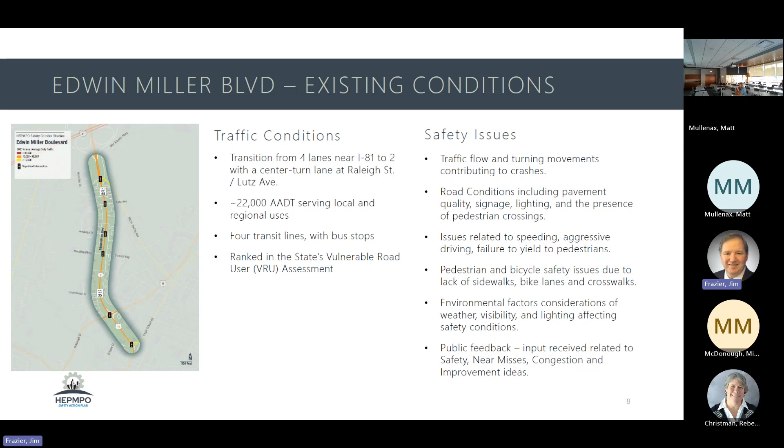There are issues documented through our surveys or other stakeholders that there is speeding and aggressive driving along the corridor, and drivers do not yield to pedestrians. There is a lack of pedestrian and bicycle facilities along the corridor. Other contributing factors like weather and lighting also contribute to safety conditions, along with some of the feedback I mentioned.

For future conditions, there are some multifamily residential developments planned just outside the corridor that will obviously have an impact. There's an increase in traffic and non-vehicle traffic expected, and there are some proposed improvements along the corridor, at intersections like Moler and Warm Springs, which is ongoing now.

Is it complete now? Still ongoing? Okay. It got the priority corridor designation, and there's a new traffic signal planned at the courthouse intersection.

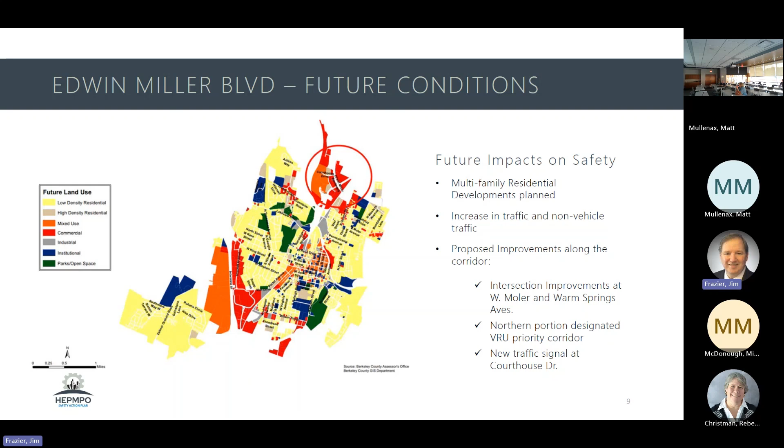The primary need for the assessment is what we'll refer to as KSI, accidents that resulted in a killed or severely injured outcome. We used 5 years of data from 2018 to 2023, showing a total of 564 accidents along the corridor in those 5 years, including 3 fatals and 6 severely injured accidents.

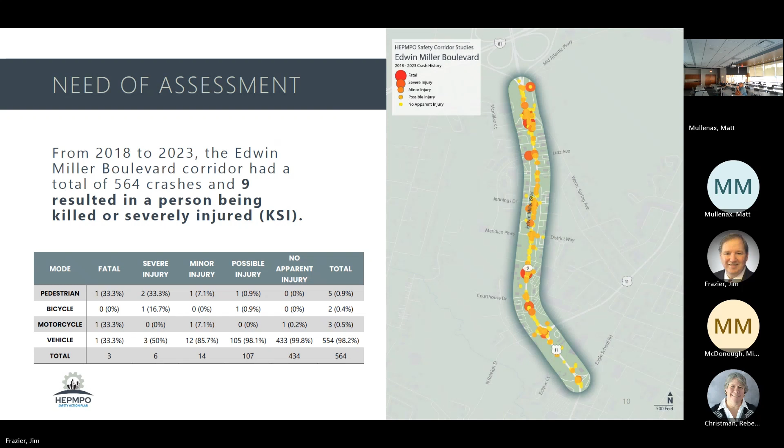We did do an on-site visit. About 20 of us walked the corridor. There are a few pictures, but it was very helpful to get on the ground and get feedback from other stakeholders on what we observed along the corridor. You can see some bicyclists there, and we saw a guy in a wheelchair driving on the shoulder. Little stuff like that is very helpful and provides good insight into what we need to recommend.

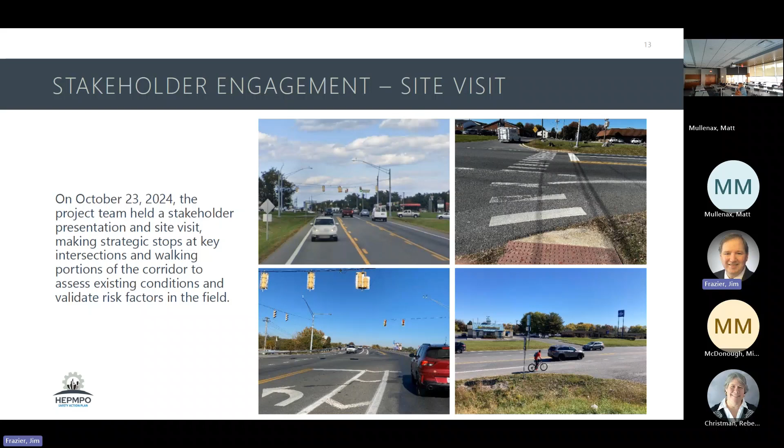As part of this stakeholder engagement, we used a risk assessment tool sponsored by Federal Highway. That means you score the exposure, the crash likelihood, and the severity of each intersection and segment along the corridor. Then from that, you recommend improvements and rescore it, and that delta shows how much risk you can expect to be reduced.

There's a lot of opportunity for reducing risk at the intersections. And like I said, the detailed assessment is included as one of the appendices if you really want to go through and dig through the numbers.

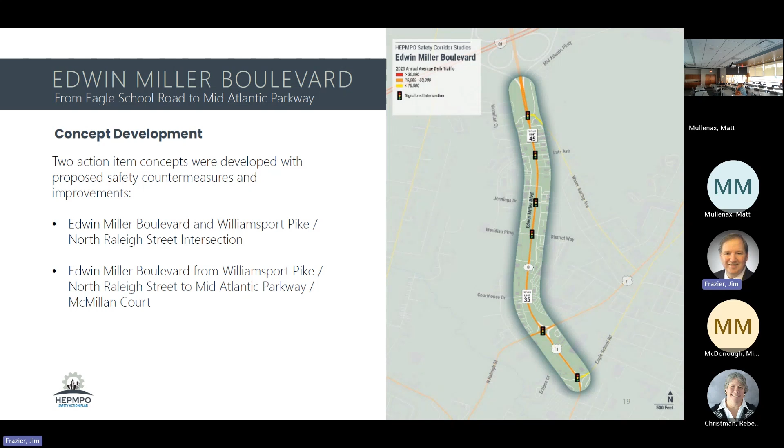We'll focus starting on the east side—or south side, it runs kind of northwest. This is the Raleigh Street intersection, and you can see a lot of the recommended improvements here.

One improvement is getting rid of the separated right turn lanes. Rebecca is on the line, our traffic engineer—she really understands it and does a good job developing these, so if I start veering off, Rebecca, speak up. That dedicated turn lane, we're recommending to remove altogether, so it comes back to a traditional four-way intersection.

They're known as channelized right turn lanes, and we're proposing to change them to dedicated right turn bays, bringing them into the main leg of the signal. So we're maintaining a dedicated turn lane, just not having it channelized and free-flow. Drivers would have to make a right on red or wait for their green signal.

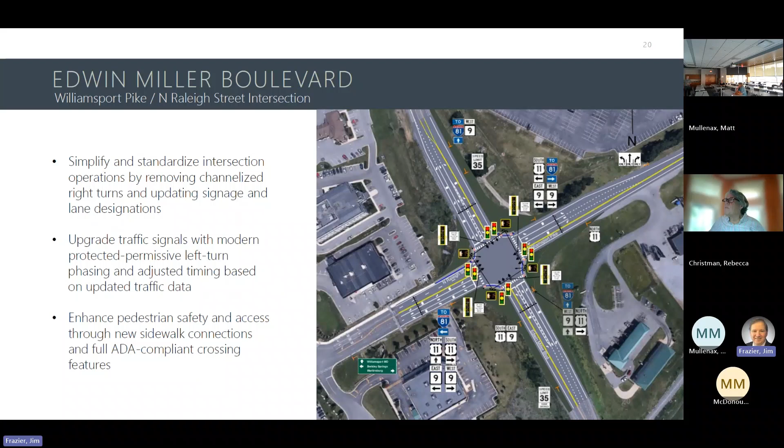This is a blow-up of a cross section of what the lanes would look like, facing toward I-81 on Edwin Miller. So, 12-foot lanes with a 5-foot buffer between the straight lane and the left turn lane, and then you have your dedicated right turn lane on the right. You can see how the channelized right turns are no longer there.

The buffer serves to offset the left turn lane so drivers can see past the opposing left turn lane and see oncoming traffic better, making a better decision about whether to turn during the permissive portion of the left turn phase when it's not protected left.

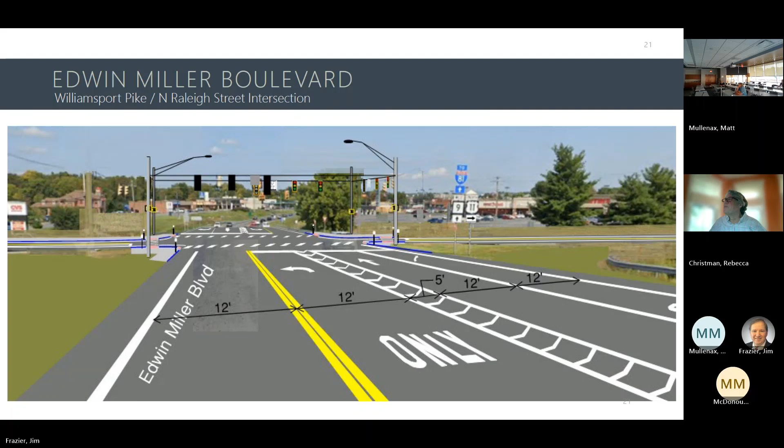Everything we're doing here is conceptual. The next phase to move forward would go into more detailed engineering, so a lot of the specifics would be worked out there.

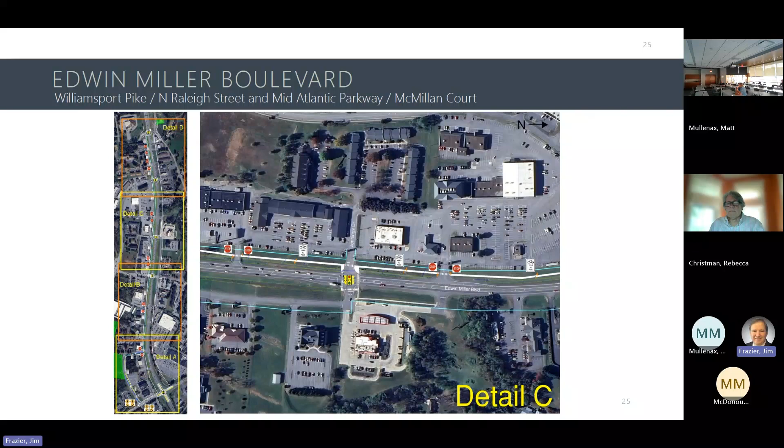This gets down at the far end, right at Warm Springs. Same thing - there would also be some bicycle signs saying yield to pedestrians, so the pedestrians would have the right of way over the bikes. Obviously a safety measure there too. So I'm going to quickly go into what these intersections look like.

Okay, so every intersection would have these improvements, a full suite of pedestrian features, constructing 10-foot sidewalks and crossings along the multi-use path. You can see here, that would be the bike path. These would be the ADA curbs. Then you have the pedestrian buttons for crossing, and also the signals would all include backplates, which would highlight them, so it's a lot easier to see, especially at night.

We're also talking about optimizing the signal timing along the corridor, and changing out the left, or either adding left turn phasing in heads or changing out what's there. If there already are 5-section heads, change to 4-section flashing yellow arrow to run protected sometimes of the day, protected permissive sometimes of the day, and then pedestrian override of only protected. If the pedestrians push the button to cross, then you don't let the left turn run permissively while they're doing that. So once you change out that head, you can do that.

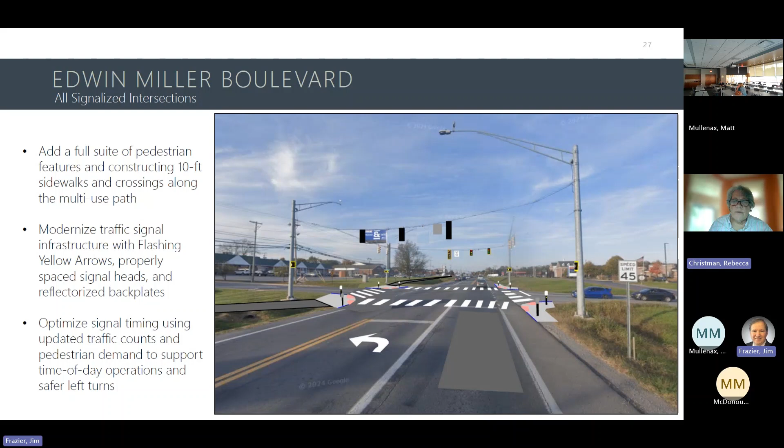The flashing yellow left turn arrows - yeah, I hope that would make a big improvement.

And then this talks about those traffic signs there, or the bike ped signs that would be installed at Forbes Drive. So that's showing an uncontrolled crossing, but to connect it, because that intersection is free flow on Raleigh Street. So you paint up the crosswalk as a high visibility crosswalk and give it a lot of signing so the cars know to look out for the shared use path, basically crossing there to get to the new park constructed on Forbes. That's the connection to the existing situation.

Right, because the bike path runs on this side of Raleigh, and this side is all sidewalk. So the bike path would cross there to get onto the new bike path. And then closer down to Raleigh, once you close off the channelized right turn lane, there's actually room to complete the construction of the sidewalk. With the channelized right turn there right now, there's no room to continue that sidewalk without falling into that giant ditch. But if you close that off, you can get the sidewalk all the way to the intersection and give those pedestrians heading to those shopping areas across the street safe passage, safe crossing.

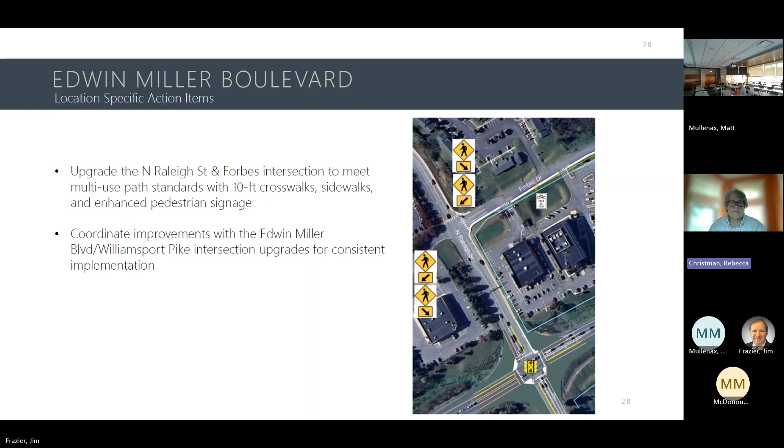Okay, well, let's stop here. Any comments or questions on any of the concepts that we've identified?

Just quickly on the monitoring and evaluation - all this is that we will have a tool to continue to monitor the crashes. 2024 data is now available, but especially after countermeasures get implemented, we can go back and see what kind of impact that had, especially on the KSI crashes.

And then going into the next steps, we are in the public comment period, obviously. That ends on the 23rd this month. After that is complete, we will respond to the comments, make any changes to the report as required or needed. Then we will finalize the corridor report, and that would go back to Matt on his website. And then if there's any assistance needed for any grant applications, we would support that as well.

It kind of sucks that it's so quick, but there's a lot of good, and then obviously those grants do have a local match, which also has proven very, very difficult.

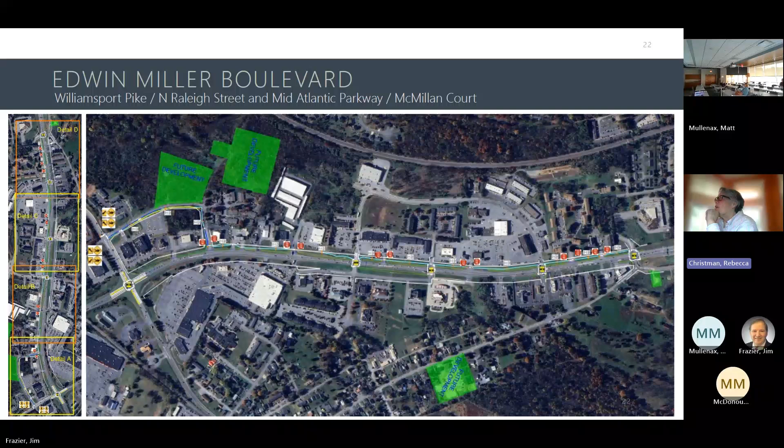And there is a tunnel under the expressway, a pedestrian only tunnel between the mall parking. Can I steal your screen? This is the expressway here, US 30. I don't know, can you guys see that? And then this is the mall, here's the mall parking, and then you can see this pedestrian path goes under 30, the expressway, and comes out to this public park that has big events.

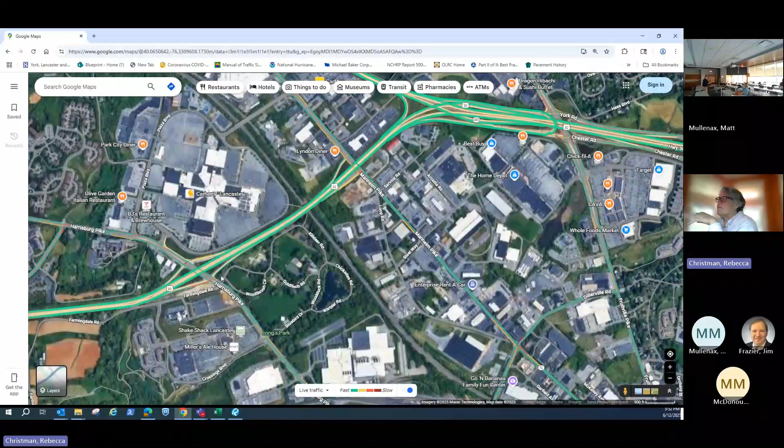And this is just pedestrians. So obviously this is a US expressway that has allowed a pedestrian tunnel underneath, instead of bringing them across this interchange, which is a similar situation as yours, which would just be hazardous.

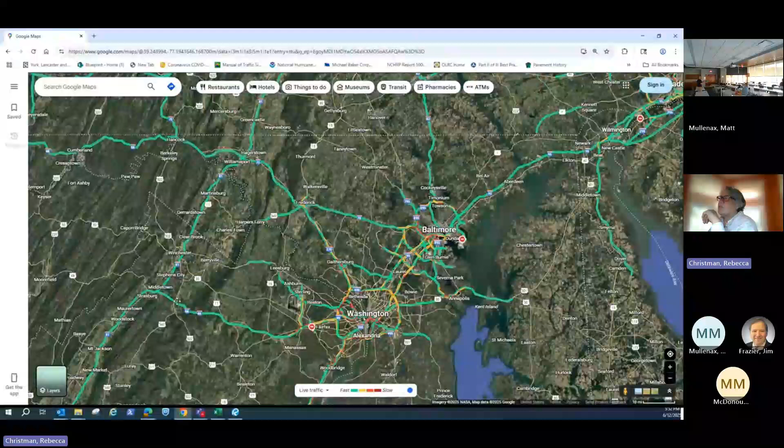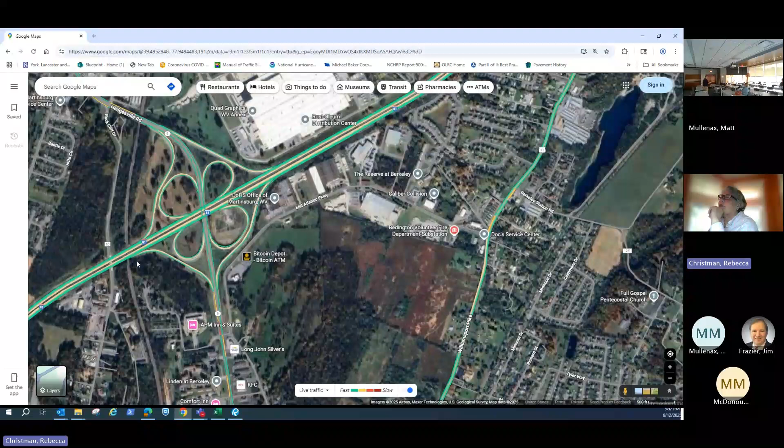It's tricky, but the buses definitely sound like a better option. Yeah, and all the EPTA's buses have bike racks on them and ADA seating.

Some language in there about future bus stops, take advantage of the routes that come through there, trying to get folks, at least provide the option, right? I don't know if it'd be a place to even add a wide spot for a bus stop somewhere that targeted there. Oh, like a little pullover area or something.

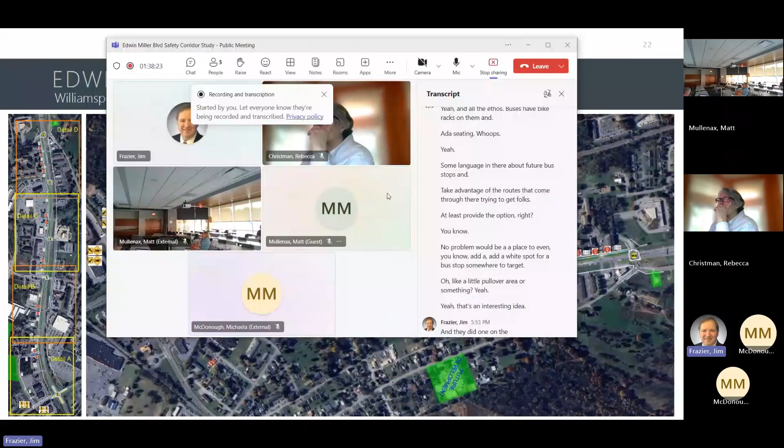Yeah, that's an interesting idea. They did one on the dual highway in Hagerstown, right in front of the senior living, you know, where most of the customers live.

We have some ridership data, I don't know if we have a ton on the flag stop stuff, but if they happen outside the geofence, it doesn't count until the next stop. So, yeah, that's interesting - there would be a spot.

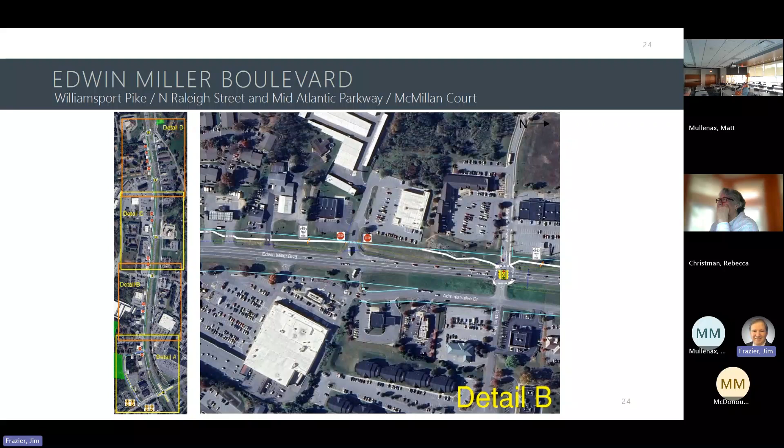You should probably lay this next to the TDP now. Yeah, we can make a note. We're working on EPTA's 5-year plan in parallel, so we can send a note to Jared to consider a spot, or at least have that reference, some sort of partnership with the state on a capital project or included in a grant or something like that.

I just wonder, when we move to race and rally, how that pedestrian traffic will change, because we'll be there to pick up everybody heading that way instead of them having to go to the train station. I could see folks walking down and hopping on there. I see people cross every now and then trying to get to the Walgreens. Actually, I see more people walking here than to the CVS.

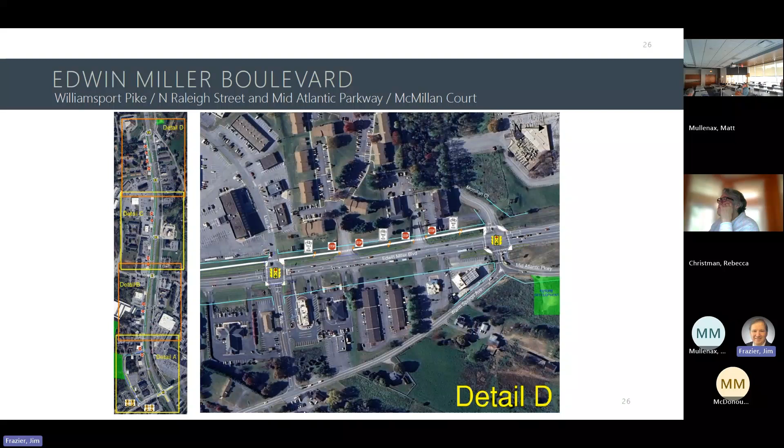My only comment is that intersection at Forbes and North Raleigh is where we got T-boned. Somebody pulling out of Forbes, I'm sure I can defer to the sheriff, but they just don't yield off of Forbes. They're trying to get out and head north on 11. So I just feel like some improved, maybe flashing yield signs or something.

They have those wonderful solar blinking signs for pedestrians, the RRFBs. I had considered that. What I'm concerned about is there's a little bit of a sight distance issue coming over the signal at Edwin Miller in Raleigh. I was concerned people might come over there, and if somebody saw the flashing light and stopped quickly or unexpectedly, we would increase rear end crashes, the exuberant stoppers versus the more relaxed stoppers, expectations crashing. I was thinking maybe pedestrians need to be more careful and not rely on people stopping. I was a little concerned about that short sight distance.

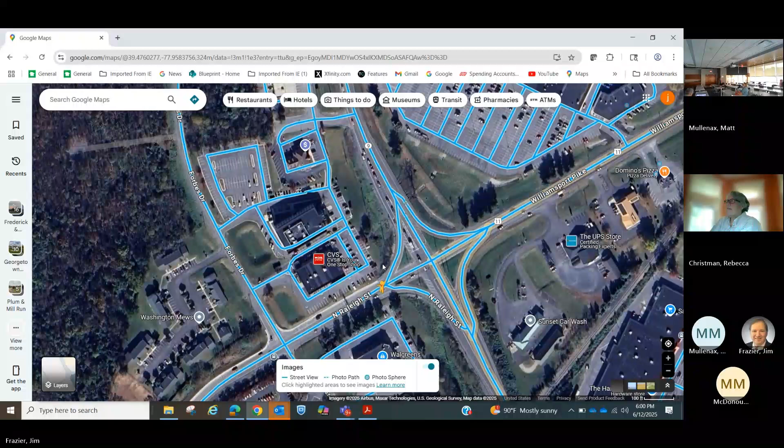I think we're talking about Raleigh Street, right? Yeah, I'm on the wrong street, aren't I? Yep, an overhead sign, black and white. Sorry about that, that's okay. Okay good, just flip it around, Jim. Yeah, there we go. That just is kind of saying this is what the lane configuration is going to be, because you don't know what lane's what, really. Right there you're only 2 lanes, and you're not even sure which one's going to open up to which side at this point, if you're unfamiliar with this road.

I'd be inclined to get rid of that right turn bay. Just let them turn out of the straight through lane, and let the left develop like a left turn bay. And then maybe, we could.

Was it a bus that got T-boned? Somebody pulled out in front of us, we T-boned them, but they literally pulled out in front of us from Forbes, turning to go north on 11. The bus was going south. No, we were heading that way, same direction. She just pulled out, didn't see it. My guess is she was confused about which lane did what. I mean, there's no missing a bus coming, so I'd be surprised.

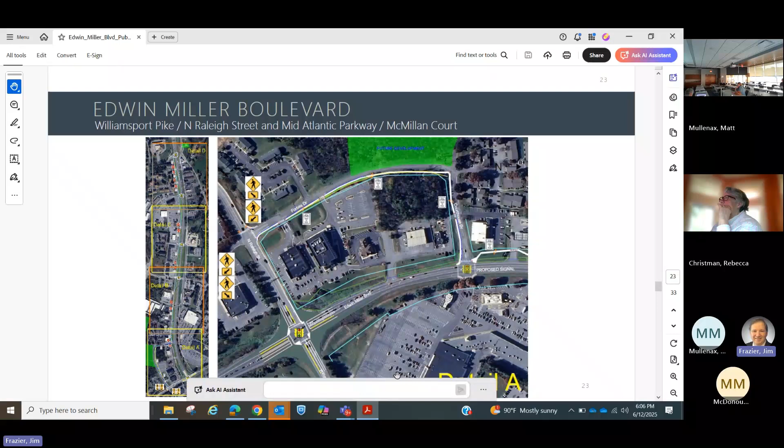Okay, any other questions or comments for the good of the order?

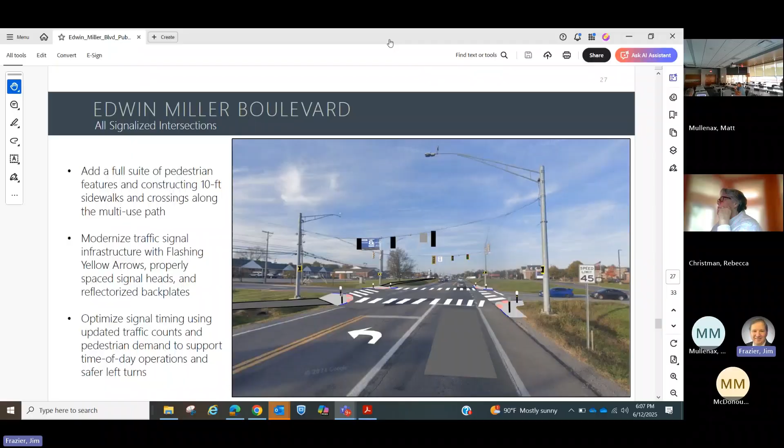Thanks, everybody. Bye. Thanks. Bye, Michaela. Bye-bye. Bye. Thank you.